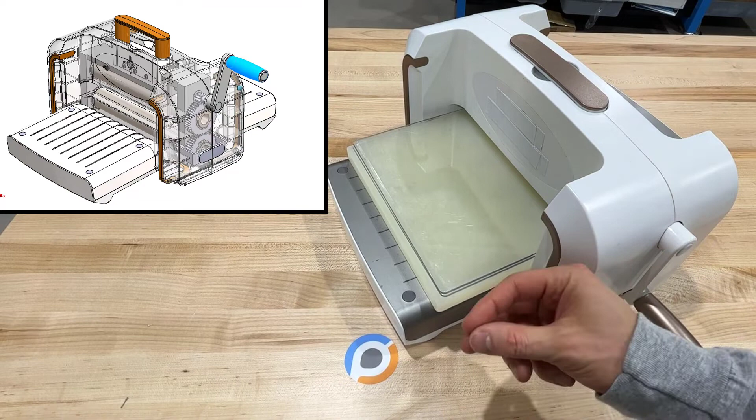By turning the crank, two rollers smash the plate together and pull it forward. Watch closely. In this video, we're going to study how this mechanism works.

This video belongs to a playlist called the Mental Mechanism Library, in which we're going to study products all around us, figure out how they work internally, and save their mechanisms in our Mental Mechanism Library. This is going to make you a better mechanical design engineer.

One feature I like about this product is the Murcielago doors, kind of like the car. Unfortunately, we can't tear apart the whole product because behind the logo that goes here, behind this oval shape, this is an insert, there's a screw behind it. And in order to disassemble the product, we will have to break it because we can't get this oval out.

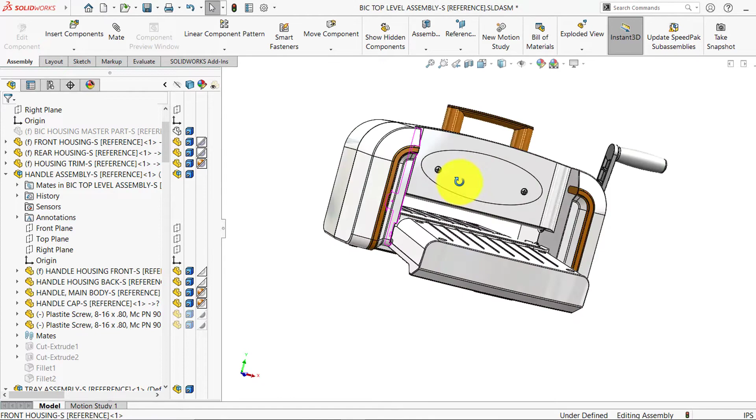Thankfully, this is a product that was designed here in-house at teampipeline.us, so I do have access to the full CAD model, and I'm going to show you how the mechanism works internally. Prior to explaining the mechanism, let's take a look around the CAD model so we can gain an appreciation for the mechanical design that was involved in this. As you can see, all the little fasteners, everything is here. It's all designed for manufacturing. These are plastic injection molded parts.

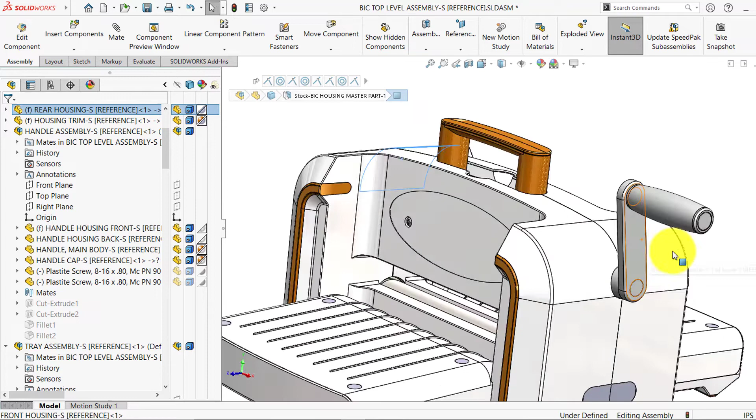Let's take a look at it from the bottom. And where things get really interesting is when we start making the exterior housing transparent. So let's do that next. Transparency. Now we can see the gears that are happening inside. And in fact, let's make the doors also transparent. So let's focus on these two rollers. This is the mechanism that we're interested in. And how does this all happen?

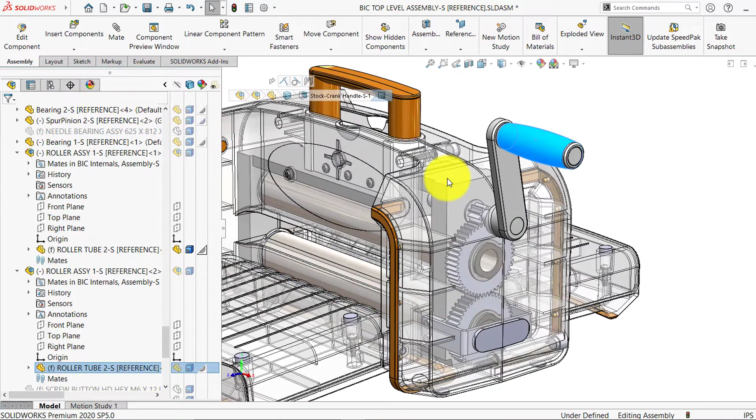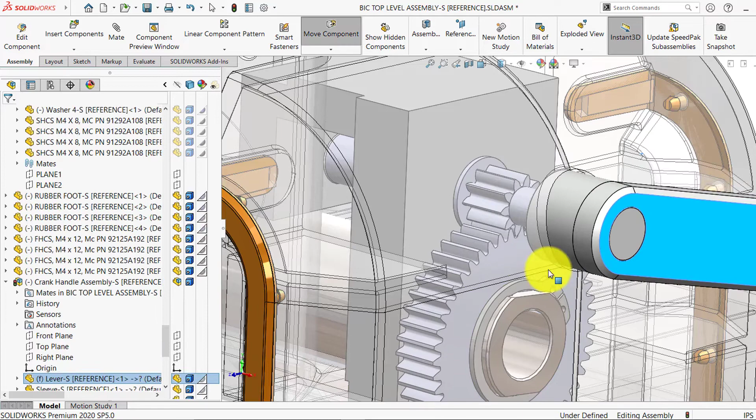So your hand is placed on the crank, and as you turn the crank, we'll see the shaft that's connected to the crank will rotate, and the shaft is connected to a gear. Let's call this gear 1, the small gear. Gear 1 engages with gear 2, the teeth right here, and I'm going to show you in motion. Gear 2 is connected to the roller, which, as you can see, as gear 2 turns, the roller is going to turn. And gear 2 is connected to gear 3, and gear 3 is connected to the roller. So that is the simple mechanism.

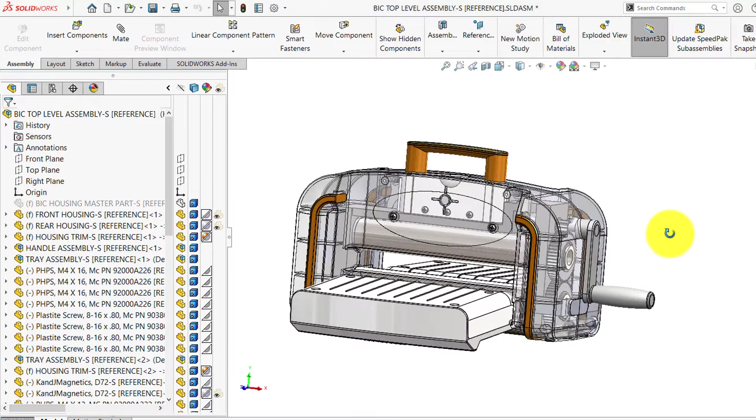One of my goals with the Mental Mechanism Library videos is to equip you with not only mechanisms, but knowledge on how to utilize SOLIDWORKS so you can become a valuable contributor to an engineering team. One thing that I want to show you is something that I haven't learned in any SOLIDWORKS class that I've taken. So any SOLIDWORKS class, to my knowledge, doesn't teach what I'm about to teach you.

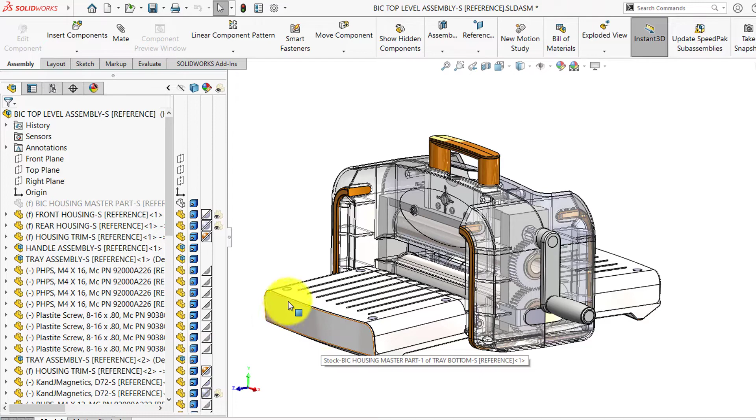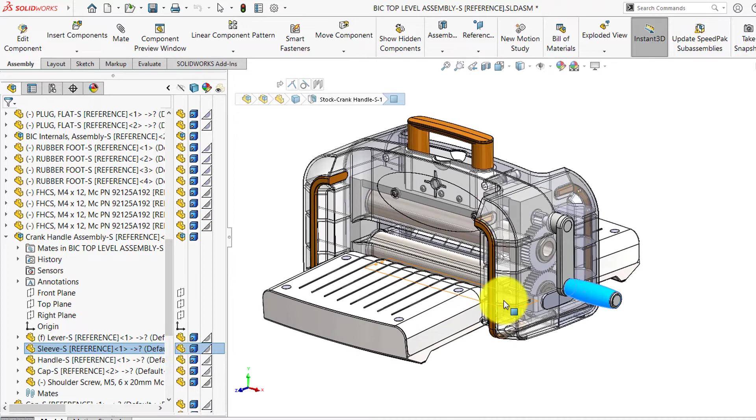But what I'm going to teach you is the skill of when somebody else designs a top-level assembly, which is the top-level file which contains all the sub-assemblies, how do you go about examining the top-level assembly? We're going to call that TLA, so that whenever you want to cause a motion, you can in fact make it happen. So right now we want to turn the crank, but we can't. I'm holding down my left click and I'm trying to rotate the crank and I can't. And I want to know why, which mate is restricting this motion.

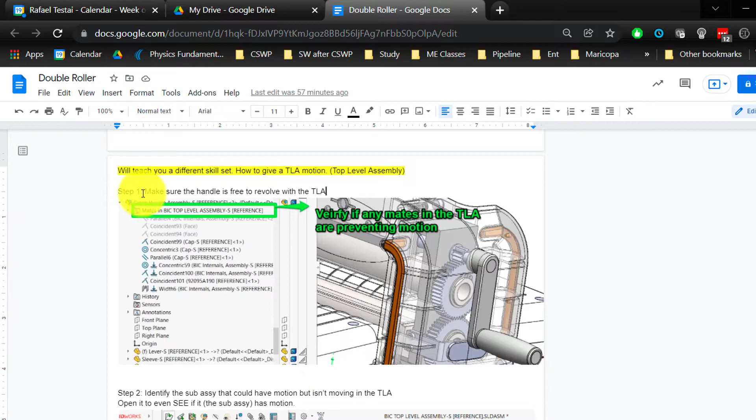Now I have a simple six-step process. Step 1, step 2, step 3, all the way to step 6, in which I'm going to show you how to basically decipher what is the mate that's restricting this motion, how to access it, suppress it, and then have the motion that you desire. Step 1. Logically, you want to start at the TLA level, top level assembly, and verify if any mates in the top level assembly are preventing the motion.

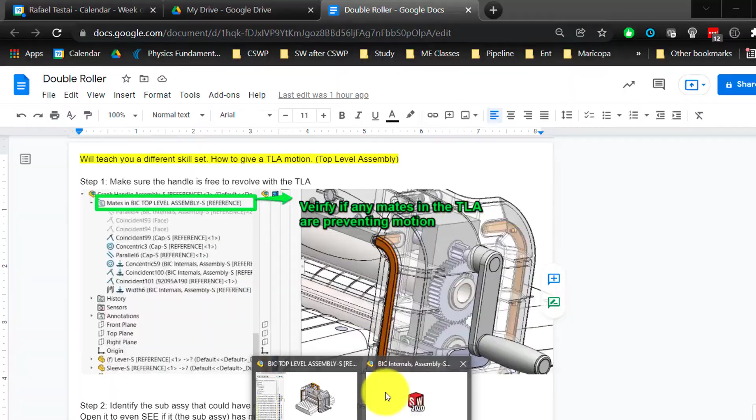Let me provide some context. So when you're in the top level assembly, you have mates that are in the assembly itself down here, and then you got mates inside the subassembly. So this is a subassembly, and there are mates inside the subassembly. So it's important to make that distinction. And nobody ever taught me to read a feature tree in a class, so I'm going to take the time to walk you through that.

And it's all about reading it from left to right, and almost like there are folders that are under another folder. So this subassembly contains all these parts that I'm highlighting in blue. And you know that because it's slightly off to the right, and that's how you read a feature tree.

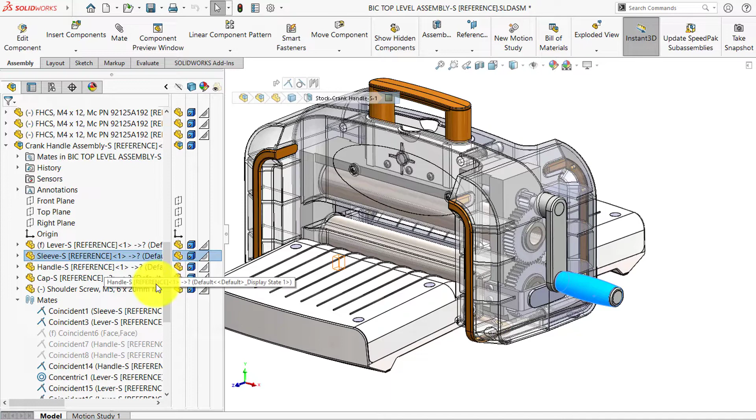So going back to step 1, we want to verify if there's a mate in the top level assembly that's restricting the motion of us moving the crank. So this is how you inspect the top level assembly. First, you click on the component that you want to move around. And you want to see on the left side here on the feature tree, where may it belong?

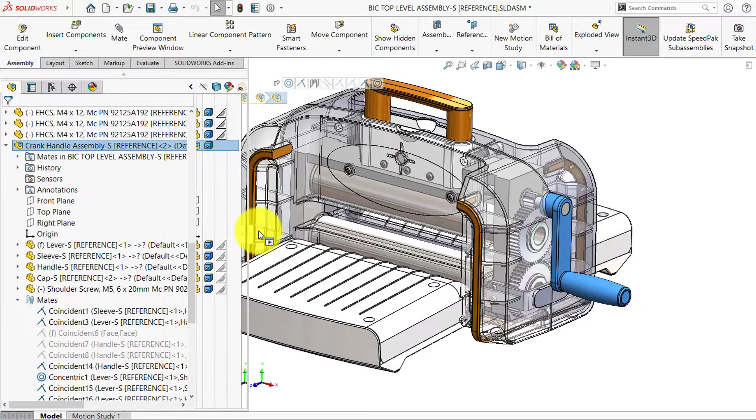Well, it's the sleeve, but I want to see what subassembly. You see a little blue icon; what does it belong in? So I click on the subassembly and everything turns blue. In fact, yes, this is what I was interested in. So then I'm going to read the mates that are in the top level assembly. So be very careful what folder you look under, because these would be the mates that are inside the subassembly. I want to look at the mates that are at the top level assembly.

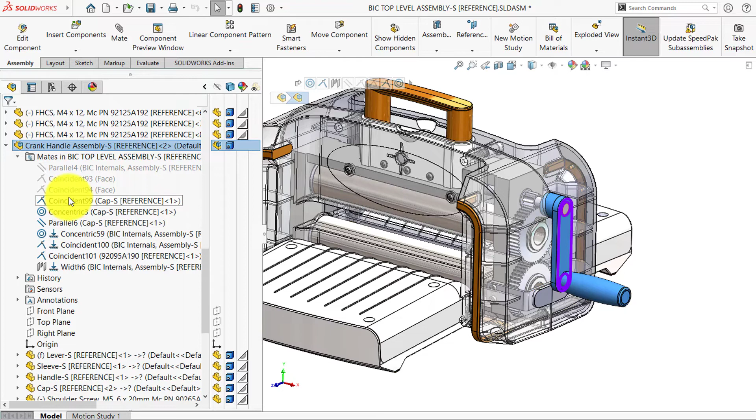Okay, so we look right here, important to understand that distinction, and we hover our mouse going down and we start looking at the different mates. As we're hovering the mouse, my eyes are on the right side of the screen. I wish somebody would have taught me this. So my eyes are on the right side of the screen and I'm hovering my mouse down.

And in fact, I must say that my colleagues here at Pipeline have taught me a lot of these skills. When I say I wish somebody would have taught me this, I mean like in a class. No one taught me this in an official SOLIDWORKS class. So my goal is to provide you industry skills by watching these videos.

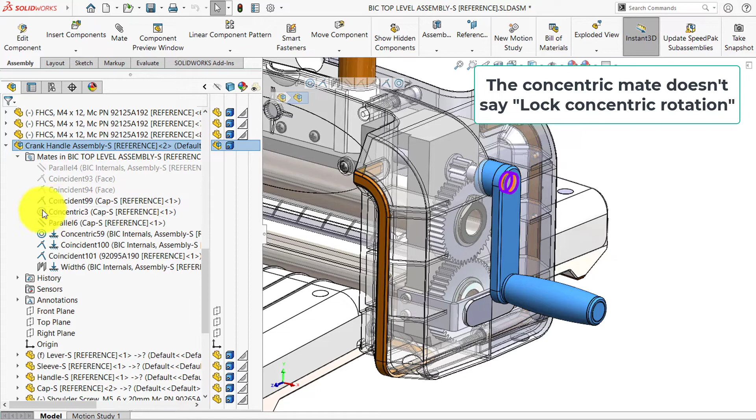So I'm scrolling down and I see nothing that could constrain the rotational motion, because this comes with experience, but concentric, that's not going to constrain rotational motion unless you have the little check mark that's constraining the motion, and something should be noted here. I forgot the exact terminology. So none of these mates are preventing the rotation essentially. So step 1, clear. Let's move on to step 2.

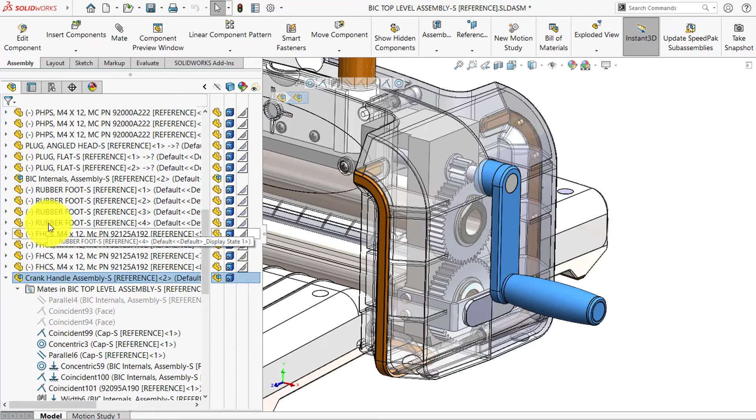Identify the subassembly that could have the motion but isn't moving in the TLA, and open it to see if the subassembly does in fact have motion. So we identified that the subassembly here of the crank handle is not restricting any motion. So let's move up the feature tree, and I'm going to walk you through. You move up, up, up, you come across the next subassembly. Let's click on that and it all turns blue. So we know that this crank must be mated to this subassembly. So let's go ahead and open it.

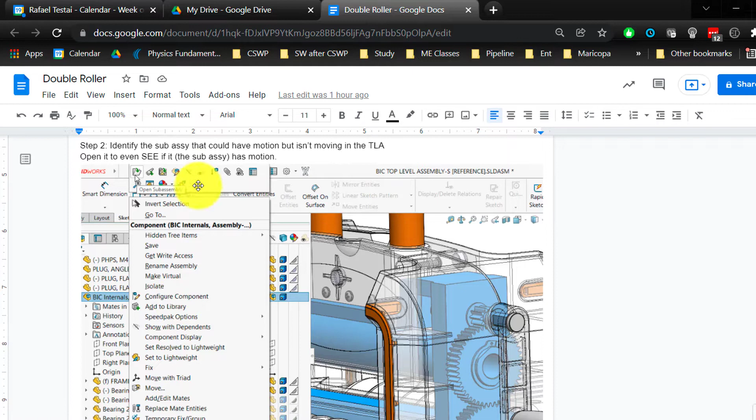We open the subassembly. Now we want to test to see if this can rotate, and it can't. Right now I'm holding down my left mouse and I'm trying to make it rotate and it can't. So the next step is, okay, identify movement, open to see if some motion. Okay, figure out which mate is constraining the gear and limiting its motion. And you want to start at the input. So let's go ahead and click on this part, as step 4 indicates.

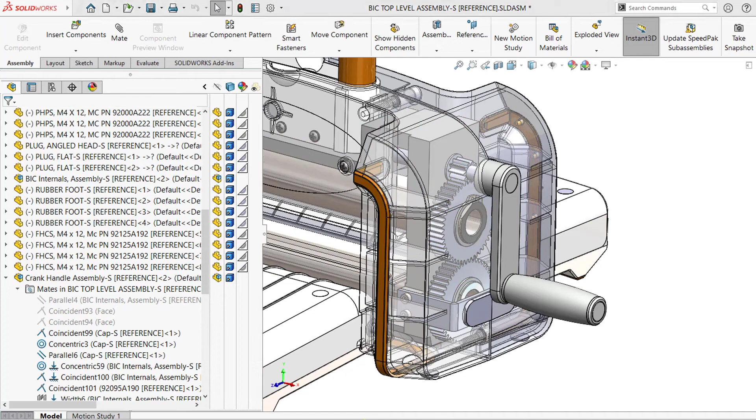And pardon me if I'm going too slow. It's just the right way to teach SOLIDWORKS a lot of times is with a mentor, and people actually take their time, like I'm taking my time right now, and gladly I'm doing this to show you how to work SOLIDWORKS.

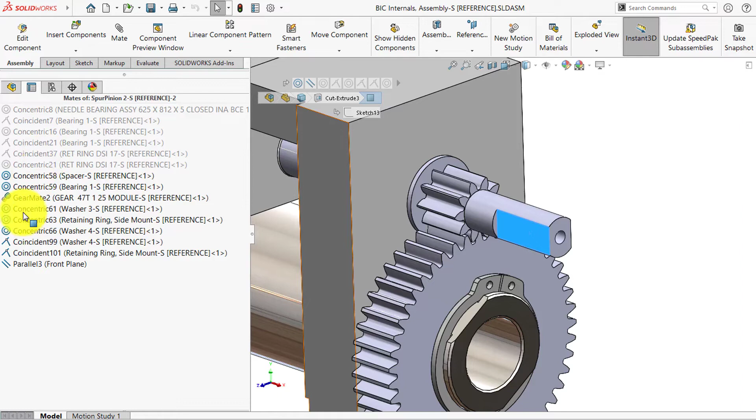So I'm clicking here, okay, spur pinion, it's not moving, and I am curious now. A little hack here: you can click in the property manager and it's going to show you all the mates relevant to this part. Now all the grayed out ones mean that they're suppressed, they're not active right now. So let's scroll, the same tactic that I showed you before. Let's look through here. We know the concentric are not going to limit the rotation. Coincident, not going to limit the rotation. Not going to limit the rotation.

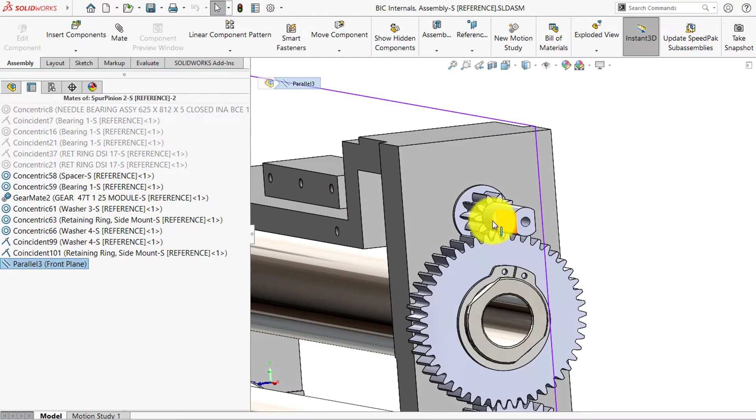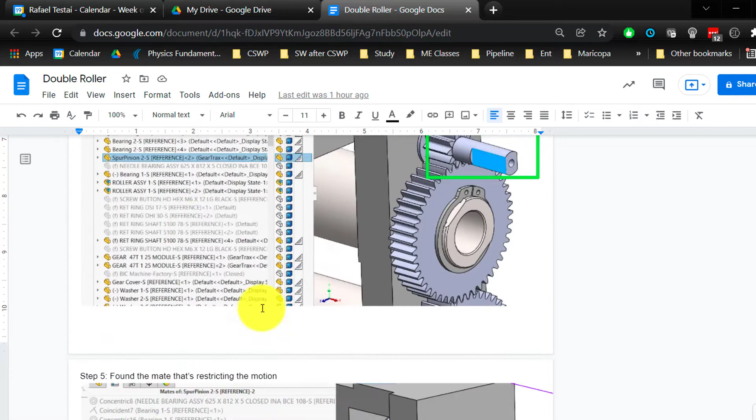Parallel. We found our suspect, because if this face is parallel to this plane in purple, parallel is constrained. It will not allow it to rotate. So we found our suspect. Now we're going to suppress it, which should allow it to rotate. Yes, we're making progress. Okay, I'm getting happy here, and I'm gonna rebuild, save, and now what would the next step be? Step 4, step 5. Found the mate that's restricting the motion. That's what we just did.

Step 6. Okay, we're gonna give the subassembly flexibility. So now we're gonna migrate over to the top level assembly. We saved it, we suppressed it. Now we migrate over. This is a good sign. We want to update because some things have changed. Let's see if we can move the crank. We still can't. And you ask yourself why? Well, you need to make your subassembly flexible.

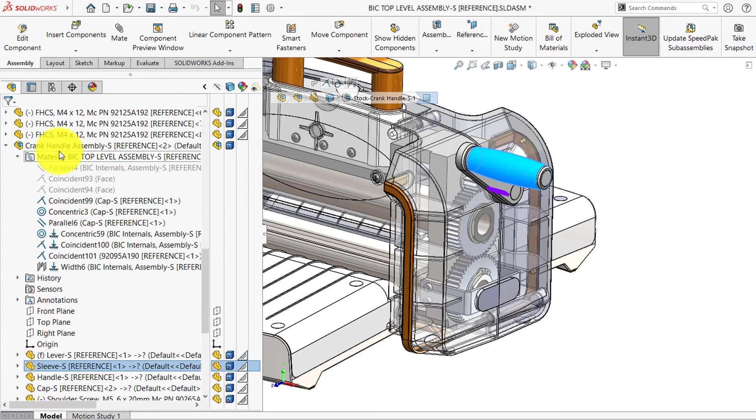So we go here, not the crank, but rather this one. So right now it's stiff. It needs to do yoga. It needs to have some flexibility. We look around. There's a little icon, make subassembly flexible. Moment of truth, ladies and gentlemen. And there we have it.